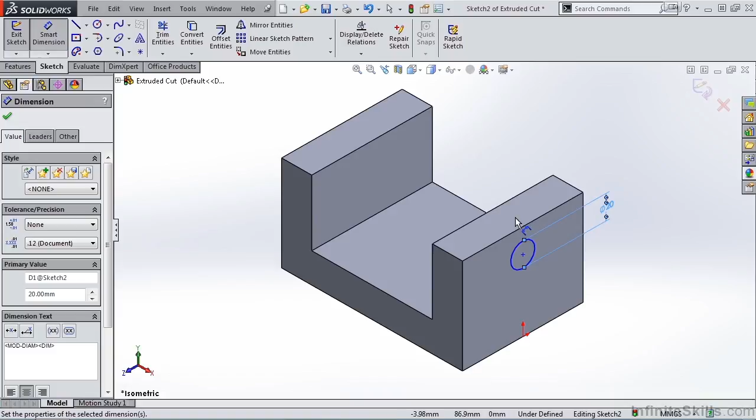Now I'm going to close out of the sketch, and you'll see the Property Manager opens for Cut Extrude. This Property Manager looks very similar to the Extruded Boss Base Property Manager. However, we do have one additional end condition: through all.

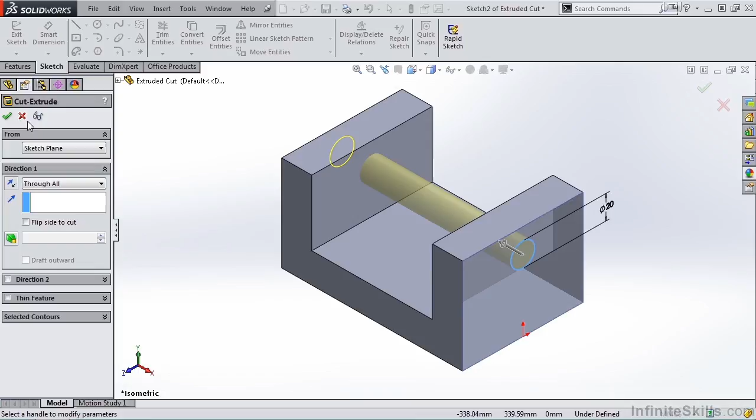I'm going to set this to through all and close out of the Cut Extrude Property Manager. The nice thing about through all is if I go to change the length or the width of this part, the hole will still continue to pass all the way through the part.

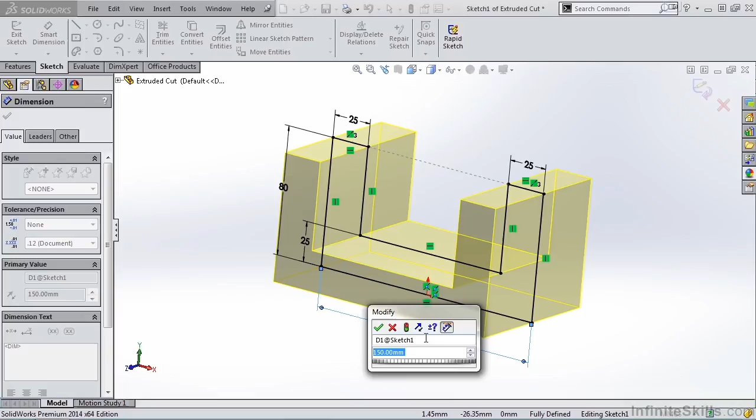So let's try that. I am going to edit this sketch for the Boss Extrude 1. I'll change this 150 to 200. I'll close out of the sketch, and notice the hole still cuts all the way through the entire part. Again, that's because the through all option was selected for the end condition.

Let's go back and edit the Cut Extrude. Notice we do have other end conditions, like we've seen with the Extruded Boss Base feature: blind, up to next, up to vertex, up to surface, mid-plane, along with a few others. We can also set a draft and a direction 2, just like we could with the Extruded Boss Base feature.

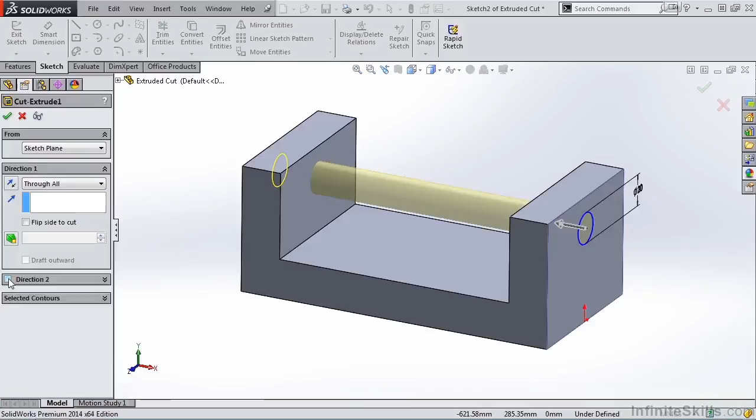Let's go ahead and close out of this part so I can show you how to create an extruded cut with an open profile. First, I need to create a new part on the screen.

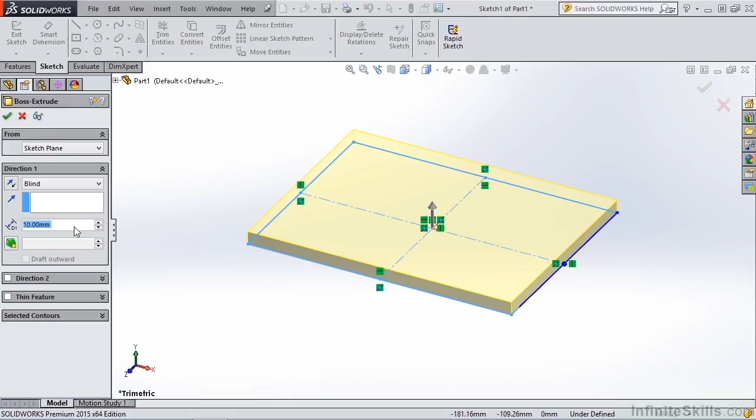So I'm going to go to the Extruded Boss Base feature. I'll create a new sketch on the top plane, select a center point rectangle, draw that rectangle, close out of the sketch, and apply a thickness of 100 millimeters. I'll then close out of the Boss Extrude feature. Let's go ahead and fit that to the screen by tapping the F key on the keyboard.

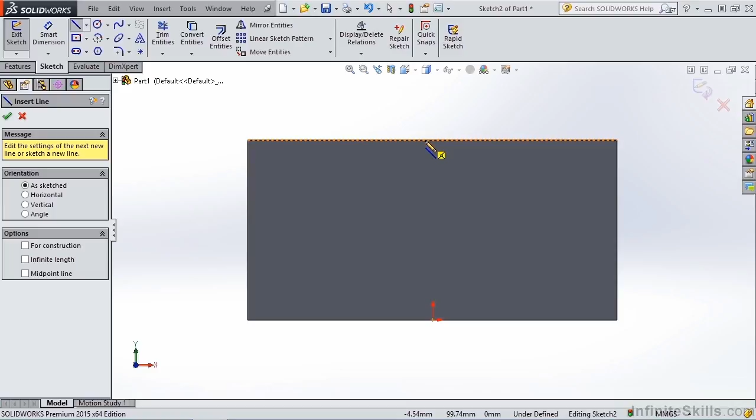Next, I'm going to create a new sketch on the front face of this part. I'll go into my line tool, and I'll begin to draw a few lines, and I'll add an arc into this sketch. I'll close out of the line tool, rotate the model, and as you can see, I have an open profile. I did not sketch geometry to close off that profile, and I did not convert entities.

Now the requirement for extrude cutting an open profile is the sketch must intersect the model. So you can see we have a coincident relation here and down here. Now let's go to the Extruded Cut feature.

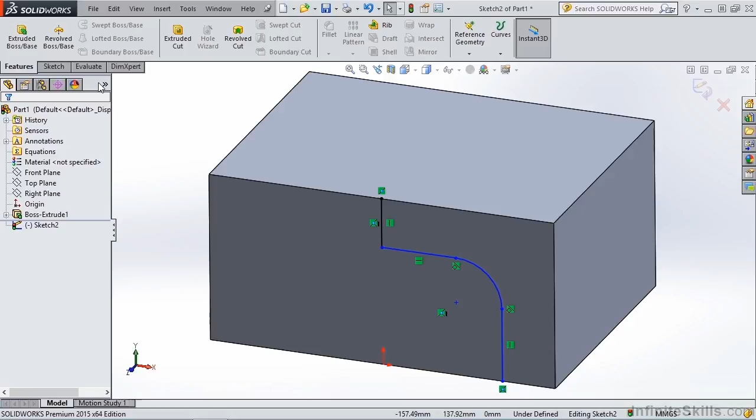We'll rotate the model once again so we can see what's taking place. And you can see that SOLIDWORKS recognizes these edges as part of the profile. I'll key in a distance for the depth of 75 millimeters, close out of the Cut Extrude feature, and it adds that Cut Extrude to the part.